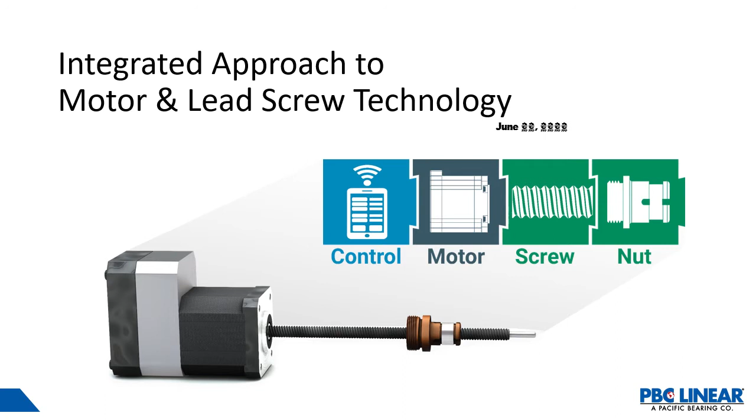First of all, on the agenda, we're going to go over the foundational elements of a lead screw motor, including the control, motor, screw, and the nut. Then we're going to go through some of the applications that are typically seen for this type of product, and explain how using the PBC solution is going to help optimize and make those solutions as good as possible. First up, let's go over what a traditional mechatronics-based solution looks like.

You're going to have the screw and nut. Of course, there's two different types of screws involved. You've got a lead screw, which is typically a metal or plastic on metal screw, or you may have a ball screw, which is essentially rolling element balls traveling on the screw. Typically, those are going to be the two types of screws that you're going to see.

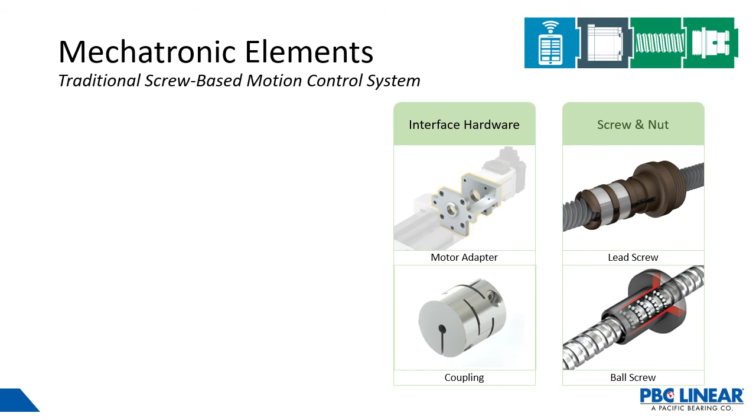You're going to have interface hardware. The screw must connect to the motor. In a traditional system, you'll have a coupling, and if you have the motor to the system, you're going to need some type of motor adapter, say like a NEMA 17 or NEMA 23 adapter. I'll let Andy talk about the different types of motors that you might see.

There's many types of motors that Moons manufactures, and with an integrated product, we could look at a traditional stepper, NEMA 17, 23, or any variety of those depending on your loads and torque requirements, as well as a step servo product, which Mike will highlight from AMP, which brings the technology closer to a servo-type performance with a stepper-type commercial cost.

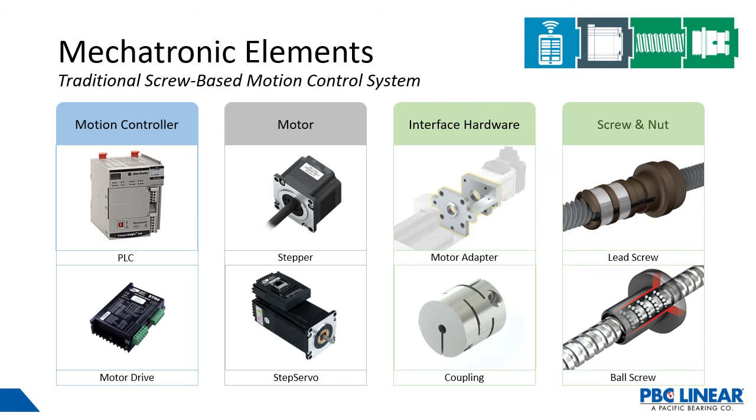All right, that was what a traditional setup would look like. Now this picture will go over what the optimized PBC offering entails. We've got the lead screw and the lead screw nut. As you can see, and we'll talk about a little more later, the coupling and motor mount adapter are not present.

We've directly coupled the screw to the motor. We've got the Moons stepper motor, which is a hollow shaft, as you can see from the picture below. Andy, maybe you could talk about that picture a little bit.

What you see is a cutout of the motor, and with this integrated solution or optimized system, we've got a hollow bore offering that we'll talk about a few of the benefits of. With our partnership, PBC essentially integrates that screw into the motor and allows for a tighter package.

We eliminate some of the mechanical components that couple the screw. It allows for a number of advantages and efficiencies on the customer side, like bigger bearings for your axial loads that are translated, etc. But we will touch on that a bit more when we get into the details of the motor.

And if you can read the chart on the bottom left very well, then you have better eyes than I do. But perhaps Mike can elaborate a bit on what that means and what the back of the motor has on it there. That picture is just a generic closed-loop control system.

On the control side, we have the same basic drive interface that we had in the traditional system. But here it's closely coupled to the motor and the screw for a tight integrated package. You get all the same local remote control options as in the traditional system, but here they're optimized out of the box for the specific motor and lead screw combinations to really reduce integration time.

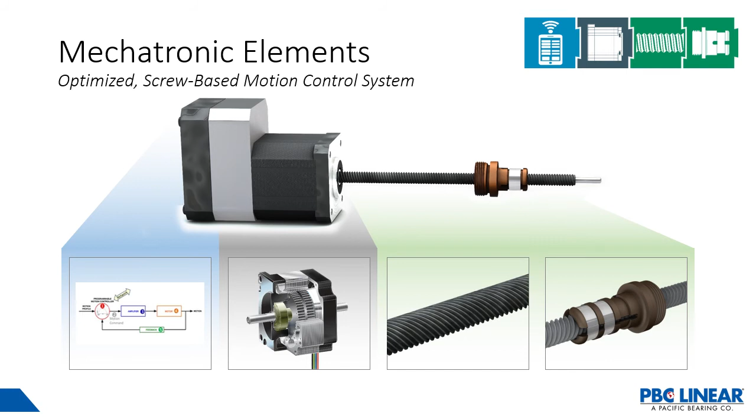Now we're going to talk a little bit about the nut. The nut that PBC is offering, which we actually just released as a general product release a couple of weeks back, is a patented anti-backlash design.

If you look at the two pictures on the right-hand side, the one on top is the PBC nut. We're calling this nut a constant force anti-backlash nut. You can see it looks quite a bit different than the traditional anti-backlash spring nut.

What we have found through great amounts of testing is that we are offering better than 2 times anti-backlash compensation using the constant force anti-backlash nut. This also offers a more consistent preload over the life of the system.

To elaborate a bit more, typically when you use a spring-loaded anti-backlash nut, as the nut wears in, the amount of preload varies, and it actually varies quite a bit. What that normally means is that when you have an application, you run it for some period of time until you see that backlash start to wear in, and then you have to go into your system and do some adjustments to compensate for that backlash change.

The constant force technology essentially eliminates the need for that step, as the backlash stays very consistent over the entire life of the nut. Also worth noting, PBC Linear, we are offering an anti-backlash nut, as you see here, and a standard nut, which has no anti-backlash.

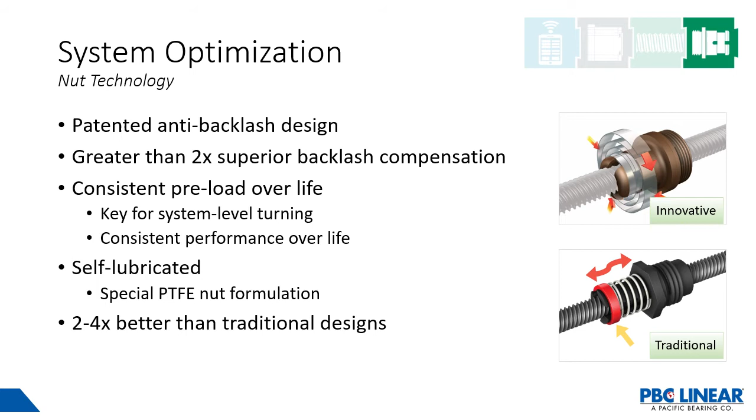We're saying this is 2 to 4 times better than traditional designs in terms of backlash and wear. The next slide is a 45-second video, which will go over a comparison of these two nuts side by side.

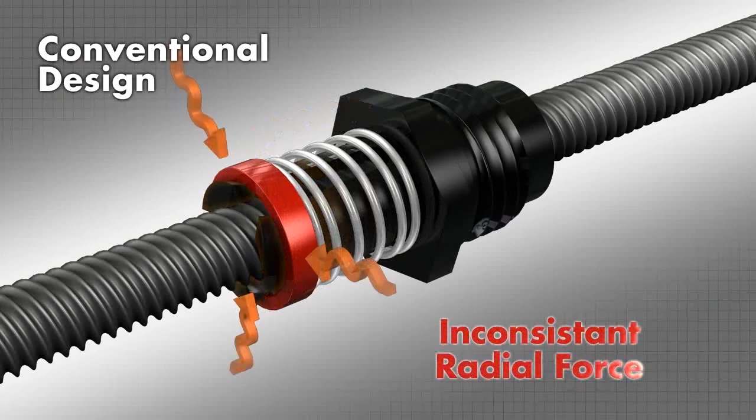PBC is proud to introduce a full line of lead screw products featuring an anti-backlash technology we call Constant Force. The visual difference is evident. Let's take a closer look. The conventional design has a variable and inconsistent radial force, which changes dramatically over the life of the application. The traditional product uses a spring, while the Constant Force uses a band. The Constant Force band applies uniform pressure to the 3 fingers, which means the preload is consistent. Most importantly, testing has shown that our technology maintains preload better over the life of the application.

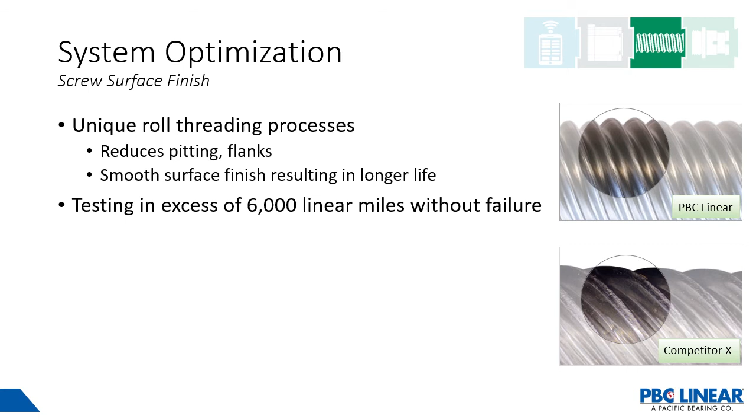To talk about accuracy a little bit, the screw we're offering at PBC has about 2 to 3 times better lead accuracy than a standard industry screw. We're at plus or minus 0.003 per linear foot. Traditionally, it really depends on the manufacturer, but some go as high as 0.010 per linear foot. It's definitely better than a traditional screw.

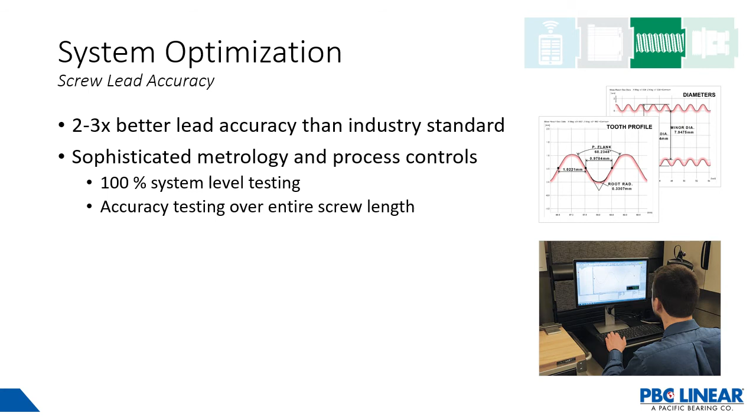You're going to have fewer components, which gives you higher rigidity. And of course, with fewer components, you're going to have more reliability, and you're going to save money on couplings and other components.

If I could add one other thing regarding the integration on the previous slide, you're actually saving space as well. So the end customer, the OEM, gets the benefit from either additional travel in the same package, or they're able to reduce the size of their package, which helps in tabletop solutions. Real estate is always a premium regardless of where your machines are going, so that's an added benefit to squeeze out extra travel or extra space.

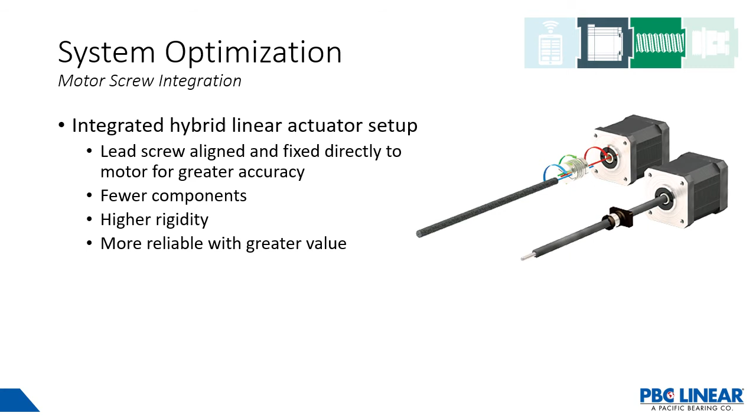Looking at the motors specifically, Moons is manufacturing over 10 million hybrid steppers a year and growing, and we're constantly innovating, looking at technology to see where we can squeeze more out of every single motor we manufacture, whether it's our standard or special technologies. I'll highlight a few of them.

A couple of them are specific to the integrated package, but we're also looking at the entire motor technology and capability of Moons, just to highlight some of the benefits of working with a partner that specializes in motor technology. We do have products available with 30% more torque in the same package.

We are able to do this by adding additional magnets into the rotor and the stator, allowing the direction of the flux to increase the amount of torque output. This leads to better acceleration and deceleration performance, which leads to better cycle times and improved efficiency on the customer side, as well as space savings in terms of the motor package for the amount of torque you can get out of it. Interesting technology to apply to specific applications.

For the hollow bore motors, we add larger bearings into the motors themselves because of the additional thrust coming from the screw and the linear translation. It allows for better support in the axial direction, which allows for longer life. We want to keep up with the 6,000 miles of linear translation from the PBC screws, so our motors need to withstand that type of travel and life, and we do that by adding larger bearings to withstand that load.

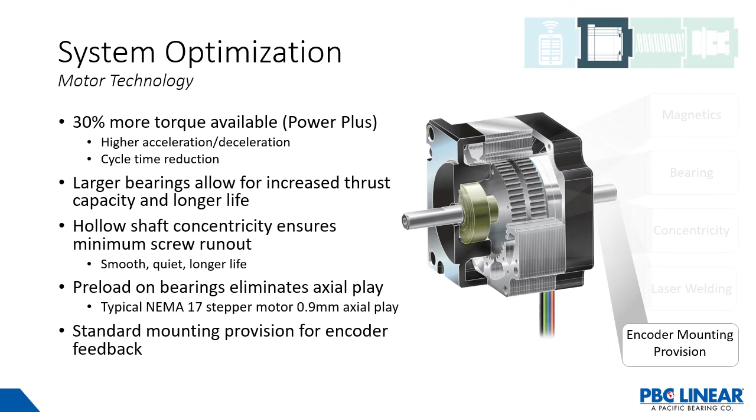Moving on to more detail on the special capabilities of Moons, a few things I'd like to highlight - there's a number of ways to address each one. Some I'll highlight here regard velocity, smoothness, and scanning. Jamie mentioned that all the lead screws from PBC are tested for precision and linear accuracy. In a scanning application, it's absolutely required to have that smoothness not only on the screw, but also in the motion.

We do have 0.9 degree step angles available. A traditional step motor is 1.8 degrees, giving 200 full steps per revolution. The 0.9 degree stepper cuts that in half, allowing 400 full steps. And with micro-stepping technology, which Mike might cover, you're able to make those movements even smaller.

We minimize the torque ripple through a variety of ways, but one of the main ones is to offer a three-phase stepper, which minimizes that torque ripple. We can talk about that more offline if anyone has any questions.

High-speed motors, we do have step motors that get up to 8,000 RPM, if not 20,000 in certain special applications. This allows us to get into a higher torque range. The slower you go, the more torque you have with a stepper, just to simplify things. By allowing the step angle to increase, we reduce the resolution.

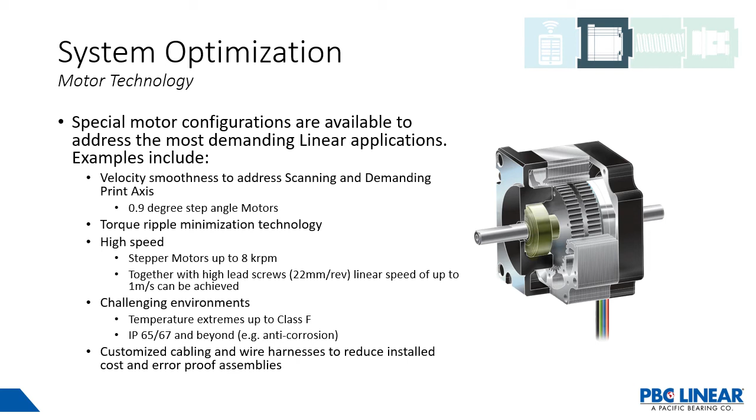Our company has a division over 600 people strong that focuses strictly on wire harnesses, and that allows us to pass that benefit and optimization onto our end user, whether it's cables, connectors, or shaft modifications. In this case, PBC does a great job of that with the linear lead screws. You can get those customizations and configure them as needed.

Mike, it's all yours. Yeah, thanks, Andy.

I'm going to talk a little bit about the step servo technology advantages we mentioned earlier, and then a bit about your control options to make these systems actually move. On the right there, you see one of AMP's step servo integrated motors. This has a Moons motor on the front and a full closed-loop control system with a 20,000 line incremental encoder on the back. One of the biggest advantages of this step servo technology over a standard stepper motor system is that closed-loop servo-style performance.

If you think about a classic stepper motor drive, it has a motor current setting, and the motor drive always delivers that set current into the motor regardless of the actual load. This means you need to set your drive to deliver the maximum required at any point in your move, even when your motor doesn't need it. For example, if you need 5 amps to do a quick accel during a long move, the drive will deliver 5 amps during the accel, also 5 amps during the move, and also 5 amps during the decel, to ensure you won't stall and lose position.

This means that during the long move and the decel, you're potentially burning energy you don't need, and you pay for that in motor heating and energy costs.

By contrast, this step servo technology only delivers the current it needs to move the motor as requested. In that same example above, we'll set the motor current to 5 amps maximum. The motor will accelerate into the move and use the full 5 amps, but once that acceleration is complete, the torque requirements drop, and so the current backs off to the minimum required to maintain the desired move profile, using that 20,000 line encoder for reference.

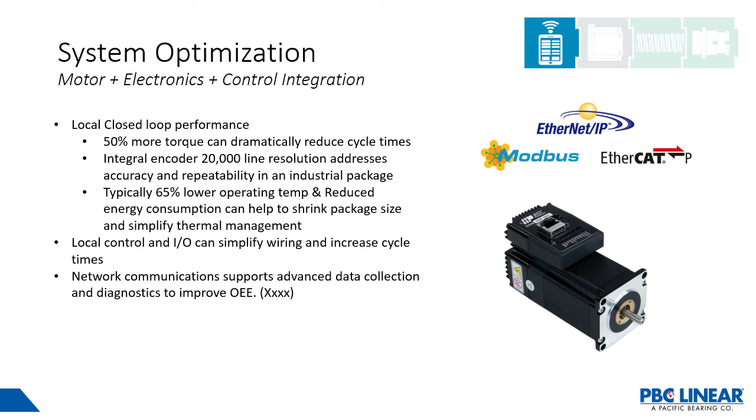We have full commanded and stored program execution over Ethernet IP, EtherCAT, CANopen, Modbus TCP, and RTU. And we have a team of apps engineers in California that can support the various integration challenges from motor sizing and drive selection through field bus and PLC integration issues.

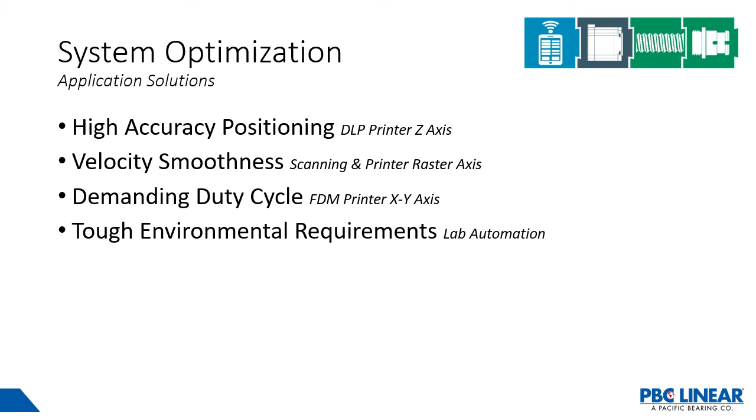All right, let's run through a few different applications here. We're going to talk about what the applications require and how the integrated lead screw motor can be a great fit for those applications. First up is going to be a high accuracy positioning type of application.

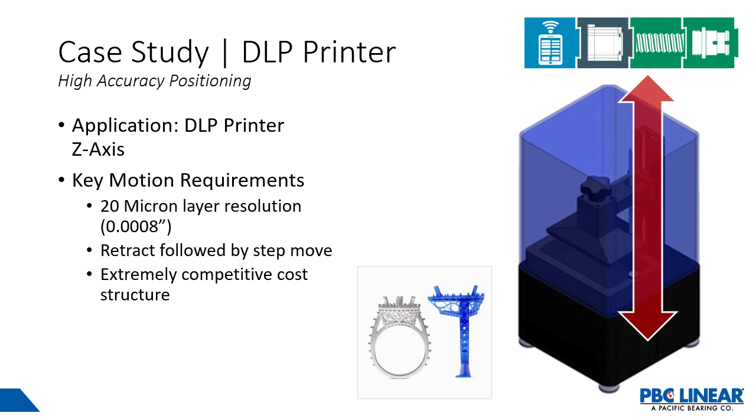As you can see from the picture, we've got a DLP printer that's moving in a Z-axis direction. The key requirements for the application are a super tight 20 micron layer resolution. We've got retract followed by a step move. And of course, if you see the word printer in an application, it's almost always going to be very cost competitive.

The way that the solution really shines here is for the screw and the nut, we offer the constant force anti-backlash nut, which is going to help with enhanced repeatability. The application is going to require bidirectional Z-axis moves. That's going to have a decent effect on the polymer viscosity, so it should actually be a benefit of using the type of nut that PBC offers.

And then we talked about the improved lead accuracy of plus or minus 0.003 per foot, so that could potentially eliminate the need for an encoder, which of course, if you can start skipping out on encoders and then other components, you're going to save money on the application.

The smart motor here, this is going to use, as I was mentioning before, mixed control mode. The home to hard stop feature, which is mentioned at the bottom there, that allows you to have completely sensorless homing. You can write a program that's saved in the drive to monitor the position of the motor, turn the current down very low, and essentially move the screw until your load hits a hard stop.

The motor can detect that very quickly thanks to that encoder, and you can back off and know, okay, now I'm in my home position.

And then you switch over into step and direction mode, and the PLC can move knowing that you are in your home position.

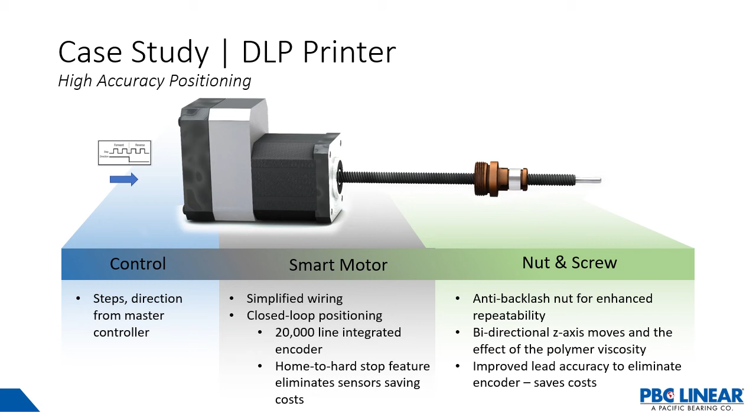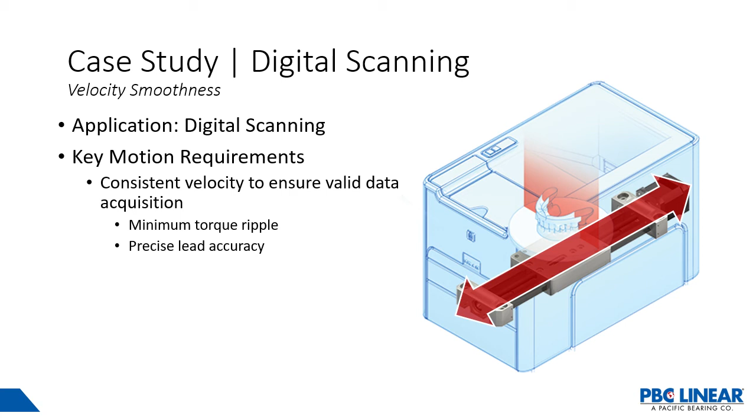For the next one, we've got a digital scanning application, which is going to offer a nice horizontal move. The key requirements for the application are minimum torque ripple and precise lead accuracy.

Again, if we go back to the complete PBC lead screw motor solution, to summarize, we're offering superior lead accuracy. For this application, it's definitely required. Any variation in the lead accuracy results in variable linear velocity, even if the motor RPM is 100% constant.

An anti-backlash nut is also going to help in this application. The consistent preload, and the ability to maintain that preload over the life of the product, is also very important. In regards to the motor technology, the whole system here is important, not just one of the parts, but all of them.

With the addition of the 0.9 degree stepper, the increased resolution on the full steps allows for better motion across the entire plane and better resolution.

Paired with the controls of micro-stepping, this just increases the ability to scan in a consistent way across the length of the travel.

And then in terms of detent torque, everything I've seen in terms of other motors out there, the detent torque is all over the place. I've found that Moons' motors have controlled that detent torque to a minimum, and quite often it's spec'd out much lower than competition. This also improves the scanning capability without affecting the motion itself.

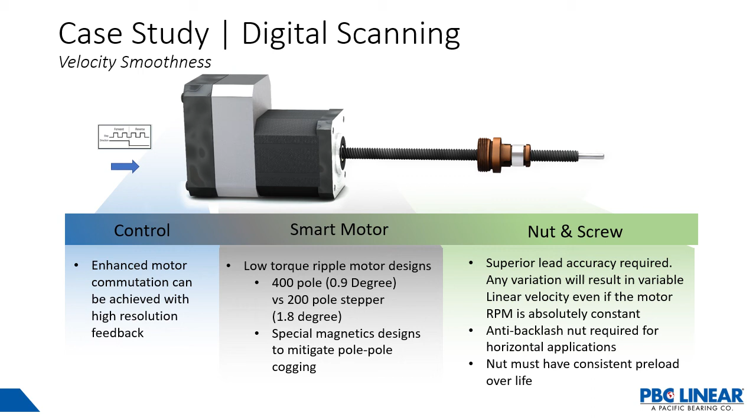I'll let Mike talk about the controls a little bit. Again, this is using that same low torque ripple 400 pole motor that you mentioned. With the 20,000 line encoder, we can achieve very, very precise move profiles. Not much more to say than that.

Okay, let's go over to the next application. This is a high duty cycle application. It's another printer—this is actually going to look something like a company some of you might be familiar with, a 3DP type of printer, where it's a large scale, large print type of application.

On this application, we've got high precision X, Y, Z requirements. Of course, we're 3D printing, so we want layer resolutions around 60 to 70 microns. As you can imagine, when you're printing something, you need a lot of short stroke moves, but you also need to be able to move long distances, up to 1.5 meters even, at a fairly quick speed—in this slide, it's saying 500 millimeters a second.

You've definitely got to have reliable life in your product, because a lot of these prints—especially if you're printing, as it says here, an engine block, or I know 3DP has actually printed large life-scale people—the larger the print, the longer it's going to take. And the whole time the print is taking place, the lead screw, motor, everything else is moving continuously for that whole period. And of course, anything with the word printer in it has got to be cost competitive, because everybody wants to get it done for the least amount of money possible.

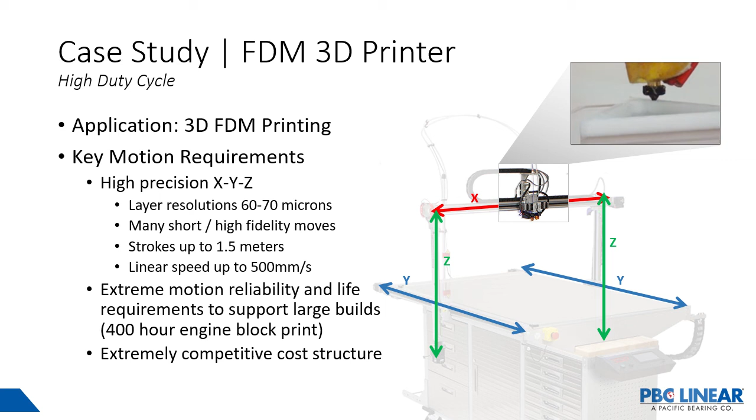Looking again at the lead screw motor solution, we definitely want an anti-backlash nut to enhance repeatability. We want to use bidirectional X, Y moves, which again the anti-backlash nut helps with. And the lead screws we offer have variant lead availability—in this case, the lead used is a 25 millimeter lead. We could accommodate all of these things with the PBC offering.

In regards to the motors, Jamie's mentioning the high lead and higher torque available from the motor in order to improve efficiency and throughput on the customer side. Because when they're printing things, they're not always necessarily printing—they need to translate from one position to another, and the quicker you can do that, the more capacity you get out of your print machine and process. Having a motor with more torque allows you to do that with higher acceleration, translate the move, and then decelerate a lot quicker, so you've got that fine control.

In terms of missteps, etc., I'll let Mike talk a little bit about that because that's tied to the encoder and the controls. One of the big advantages here, again, is that integrated encoder.

When you think about a step and direction application, a lot of people think, okay, I'm going to feed a step in and the motor is going to move one step. With stepper motors without encoder feedback, that's not necessarily the case. The motor is going to try to move one step, but you have no idea whether it got there. With these smart controllers on the smart motor, you can feed in steps and the motor is guaranteed to move that number of steps. As long as your step input signal is clean, the motor will make it there, and it'll let you know if it's taking more torque or taking longer than expected, but the motor will make it there.

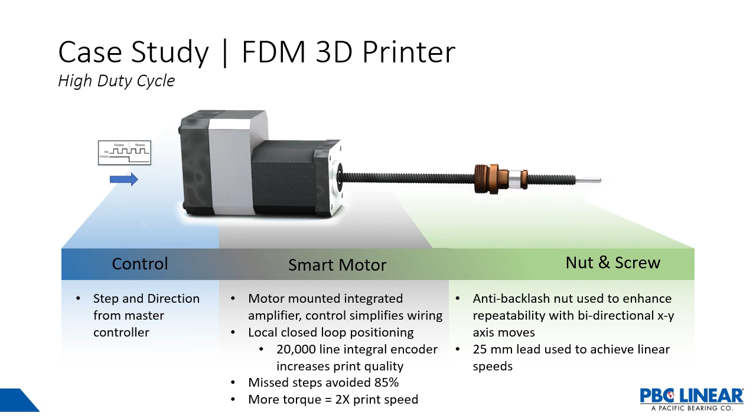We do have specialty materials. Like I said, it's a Delrin self-lubricated with PTFE. We've also made custom brass and bronze nuts for customers depending on the application and their needs. And then, of course, the inevitable other options. If your customer has an application where they need something that doesn't look like we might have it, let us know, and if the opportunity is there for us, we will definitely be glad to look into that for you.

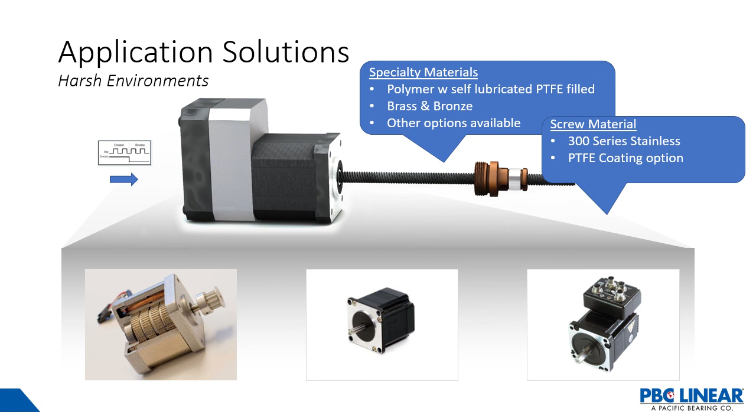This is an anti-corrosion technology that Moons has available. Typically what customers do when they've got a harsh environment is they try to seal all the electronics, seal the motors, and seal all the moving parts to avoid any ingress of external material, whether it's liquid, dust, that kind of thing. With humidity and liquid in particular, chances are with the temperature changes of the motor, quite often the motor acts as a vacuum and inevitably some moisture will get sucked in. And if you're sealing the motor, you're trying to stop material from getting into the motor itself, which will cause it to die eventually.

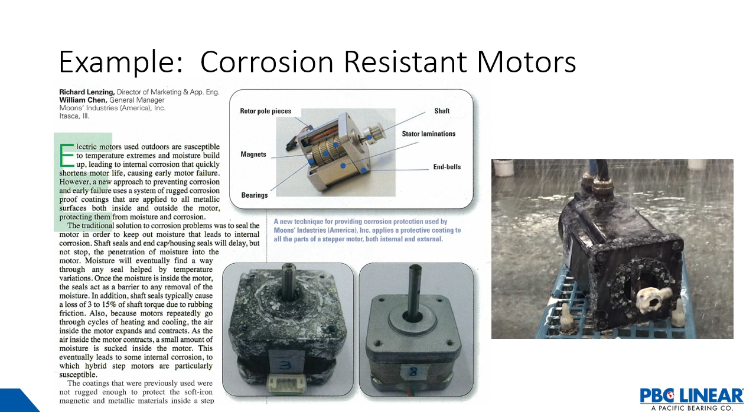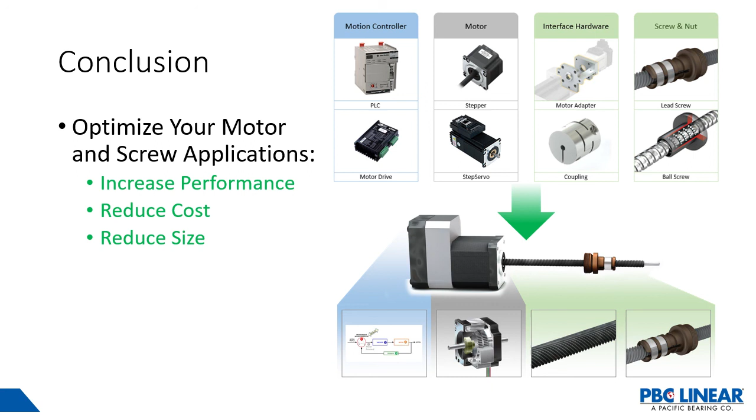To summarize, what we talked about at the start was what a traditional lead screw motor looks like with the interface hardware and all of the other motion controls, etc., that are required to make that happen. And then we compared that to the PBC solution, which is an integrated lead screw stepper motor. It's also really worth mentioning again that this can be ordered with one part number, which in its own right is going to help save you time, because you could go to one place, buy one thing that accomplishes everything the application needs. So it's going to increase your performance with all the wonderful advances that Andy and Mike talked about in motor and control technology. That's also going to reduce your cost, and it's going to reduce your size. With that being said, I'm done.